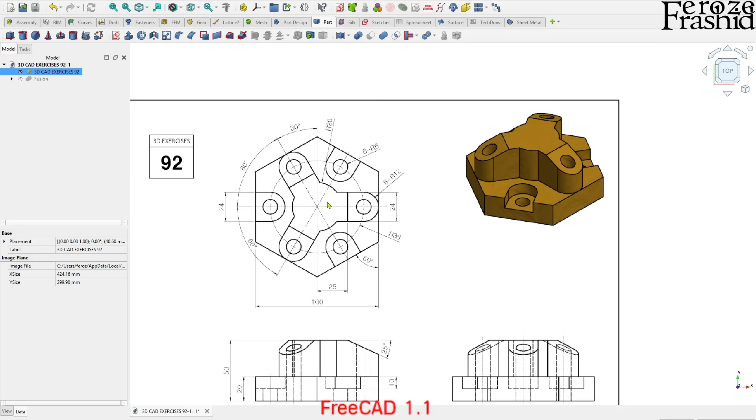Today I want to work on this beautiful model downloaded from studycadcam.com. Here we have this geometric shape that can be built in 2 layers, and I want to focus today's model building specifically on replication by arraying. In the forum, I've seen several posts where beginners in FreeCAD try to build this whole sketch in one sketch, trying to build this complex model out of 1 or 2 sketches. The point is we can take one repeatable unit, build off of it, and then replicate it later. That makes our life a lot easier, and that's what I'll be focusing on today.

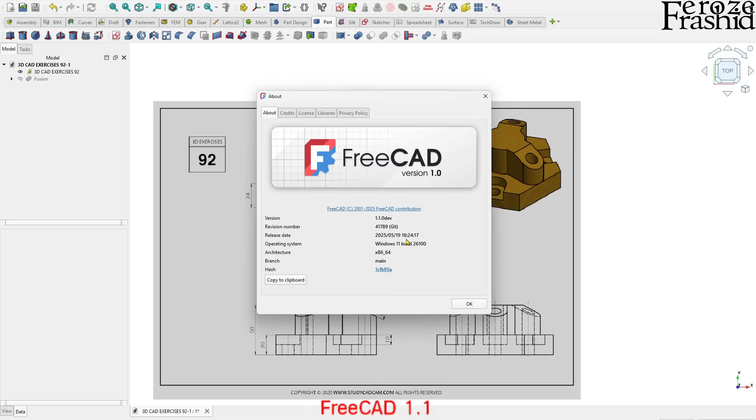I have FreeCAD 1.1.0 developers version installed on this computer, so I'll be using that. But if you are using FreeCAD 1 or 1.0.1, the current stable version, it will be the same except maybe one thing, so I'll tell more about that when I use that feature. Other than that, it should be the same. I'll also be using both part design and part workbench, so I can show you how to use 2 different kinds of arrays out of these workbenches in this model.

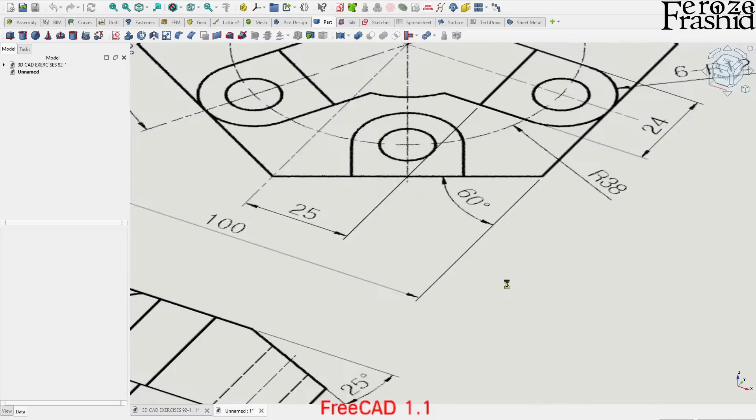So with all of that, let's go ahead and start building this model. I'll start with a new file, and then I'll pull in that technical drawing into this workspace. Just drag and drop works.

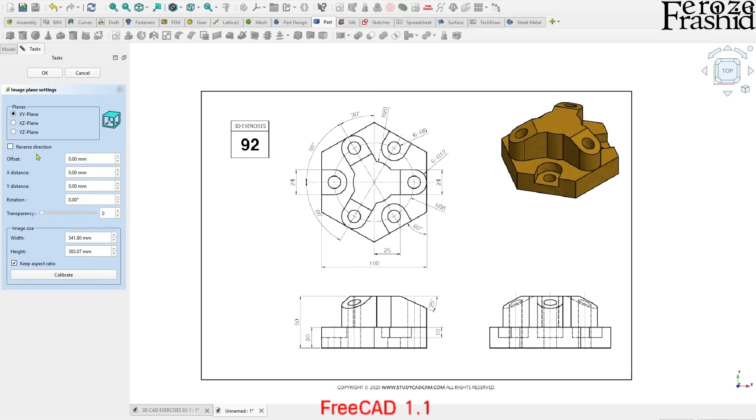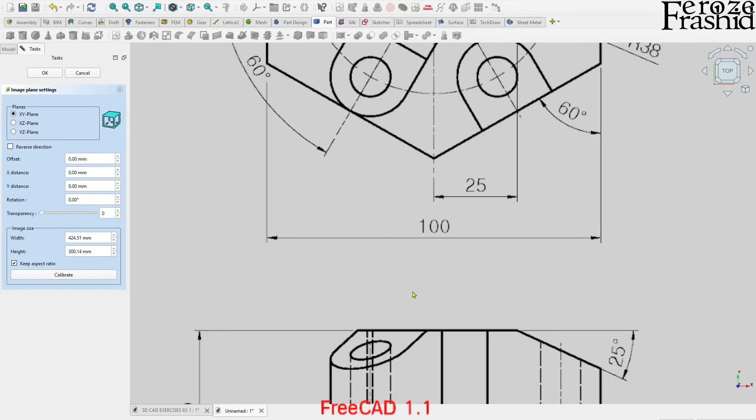Here this dimension is given as 100 millimeter, but we will have to make sure that's 100 millimeter measuring of the image, so let's do that. Let's calibrate this image. Double click on that image, and on this panel on the left, I want to go to calibrate, and I'll have to do 2 clicks. One click at the end of one end of this 100 millimeter dimension, and another click at the other end. Now in this middle cell, type in 100 from your keyboard and hit enter. So that is now calibrated.

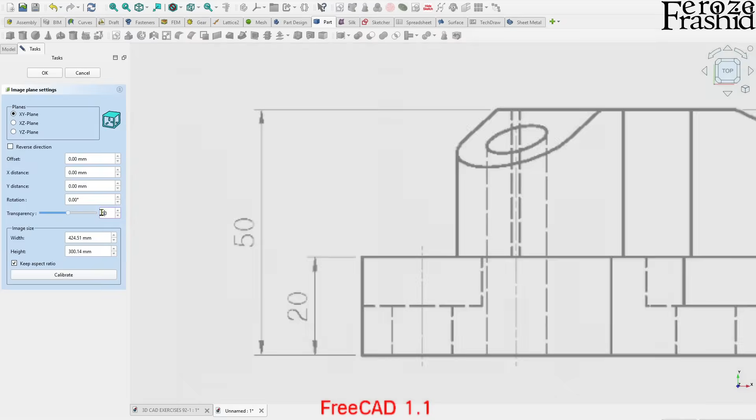If you want to verify your calibration, pick another spot and do the calibrate. Don't do the second click, but here it says 50 millimeter, which matches this value, so I guess we are fine. Hit escape, and now transparency, make it 50. It will come in handy later. And then we want to keep it on XY plane. We'll be using this plan view to work, so XY plane works fine there.

Now we will start with part workbench, and then we'll move on to part design later on. One of the shortcomings of part workbench, not a limitation, is it does not show the center of the workspace right away. So I want to view that. Go to view and go to toggle axis cross, AC. That will show you the center of the workspace, and then bring in the image, and you can see that the image is definitely not at the center.

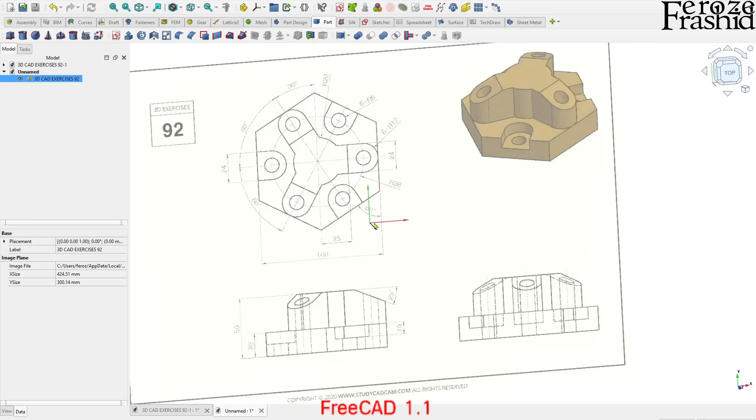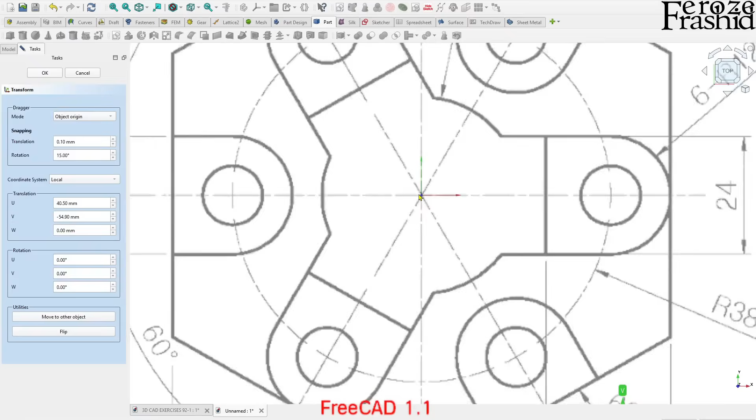So this is our image center, and I want to move this center to the center of the workspace. That's part of the image processing. Right click on the image, transform it, and make it like I did it 0.1 millimeter increment. You can work on it as a 1 millimeter increment too. I want to use these 2 axes to bring it to the center. A nearby value would be fine. That's dead on center, so that works. That's the end of the image processing.

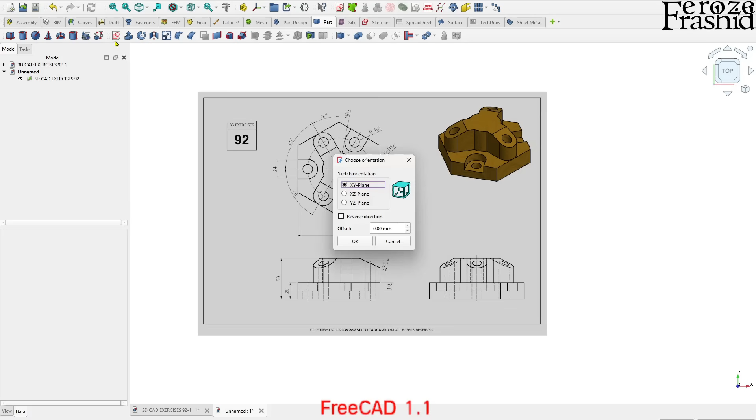Hit AC on the keyboard, that will take away that axis cross, we don't need that right now. Now, as I mentioned, I'll be starting work in part workbench. Here I want to start with a sketch, since sketching is the first step of modeling. Let's do that. Because the image is on the XY plane, we want to start in the XY plane.

Now here I'll have to sketch one part. Which part do I want to sketch? My goal is to build this lower part first. So when I'm building the lower part, this upper part, these three ends, I'm not keeping that in my consideration. I think this lower part is like a hexagon, so taking these six sides, I believe...

Taking this part between this part would be much easier for me to draw, so I'll do that. I'll take the polyline and draw this boundary. Because the image is calibrated, if we go off that image direction, it will be almost perfect, but we want to make it perfect. So between these two edges, hit D on the keyboard. Select these two edges, the axis and one of the upper edges. Hit D on the keyboard, that will bring in the dimension. Apply 60 and hit enter. So that's one edge, and do the same on here.

These two are bound by that. I think these two are equal in length. So there it is, and the length is 50 millimeter. It's not directly given here, but you can do some calculations. It will come out as 50.

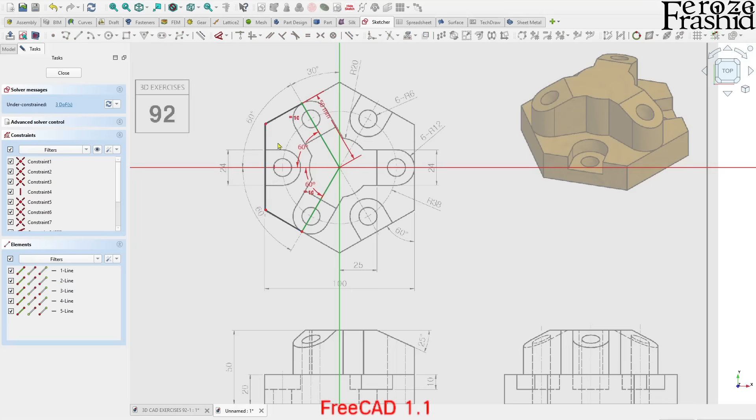This distance, this axis, this edge is symmetric by the axis. So take these two ends and take the axis as the third choice, and then hit S on the keyboard.

Now let's do this distance. This distance is 100 divided by 2. So take this point and hit D on the keyboard. That will bring in the dimension. Based on where you're taking your mouse, it will be different kind of dimension. So bring it downward and apply a 50 millimeter dimension there.

So we have one degree of freedom, which is this side, the length of it. I think this is 50. Let's see, take that, hit D on the keyboard. That comes around like 57.

I don't know about this length, but we know the angle, 60 degrees. So take these two ends and hit D on the keyboard and apply 120 degree angle. So we got away without having the length here.

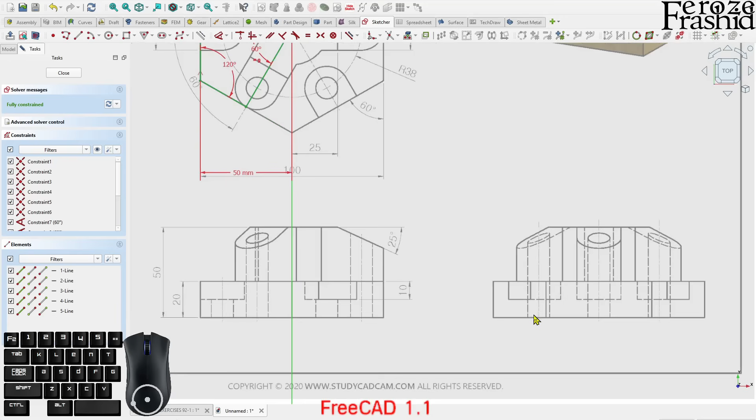So that's a fully constrained sketch, and I can see that there is a hole in the middle in this part right there. So let's draw that hole as well.

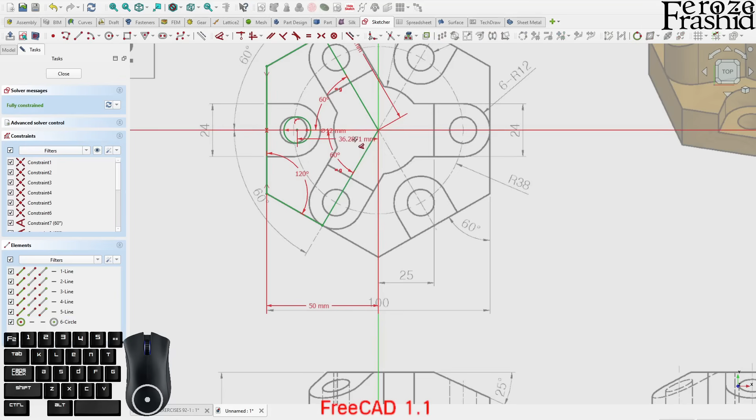This is a 12 millimeter diameter hole, and that is sitting on a circle of radius 38. So the distance between this point and the axis, the center, is 38 there. So that's my first sketch.

Let me hide this image by hitting space. So that's my first sketch. Now this is sitting right at the origin.

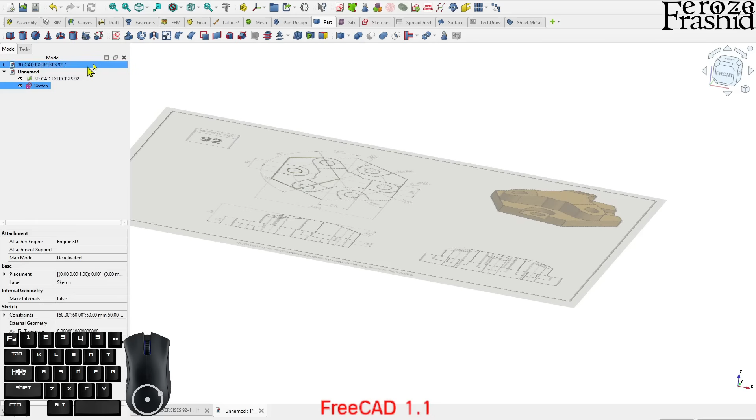Because I want to build this lower part first, I want to move it downward. So I'll select that sketch and extrude it for 20 millimeter, but make it downward and hit apply. So it is going downward.

So that's one part. Now there is a depression right here. It will come at this location. So what I want to do is draw another sketch right at this location, but it is at the origin, so I don't have to attach my sketch to anything. I'll just draw a sketch on the XY plane right there.

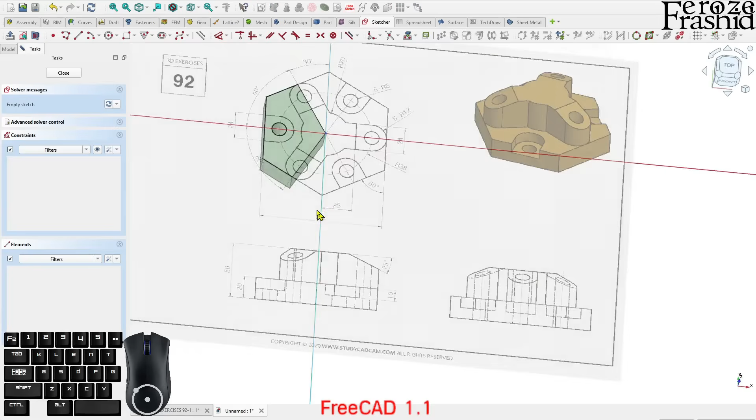And here I'll just draw this depression. So it will be something like this. To close it out, hit M with the polyline. That will bring in the arc, and I apply a tangency between these two.

And so this point, the center, will be at that same 38, but first take this point, put it on the axis, and then apply a dimension of 38.

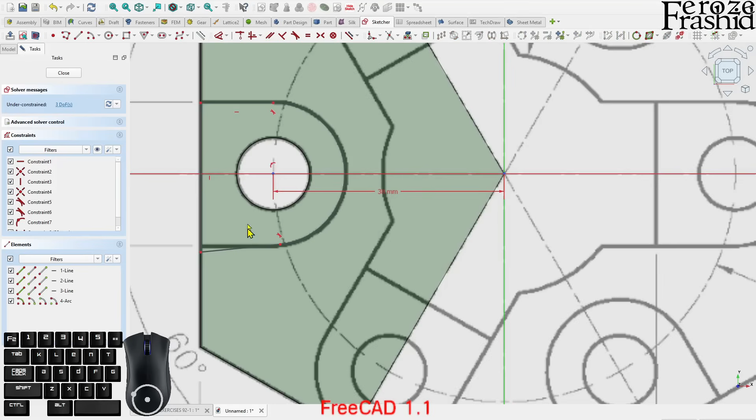We could also take this external geometry from the previous extrude and get away without applying this 38, but I know that for sure, so I didn't bother going for the external geometry. And let's make this one horizontal.

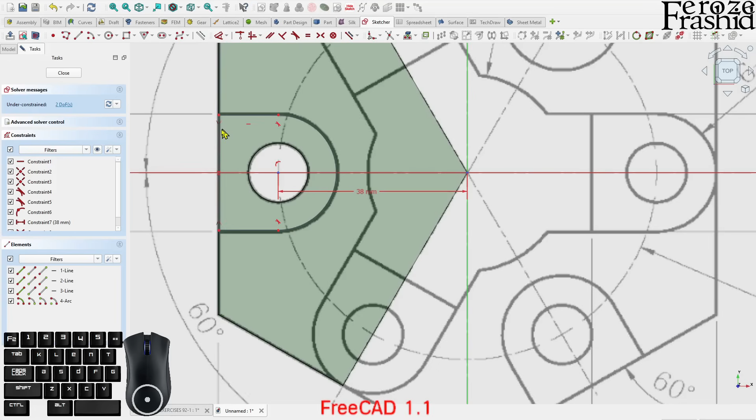Now let's make this symmetric by the axis, and let's come up with the total length. I think there is a radius somewhere here, radius 12. So this is radius 12, and that's it. Oh, there it is.

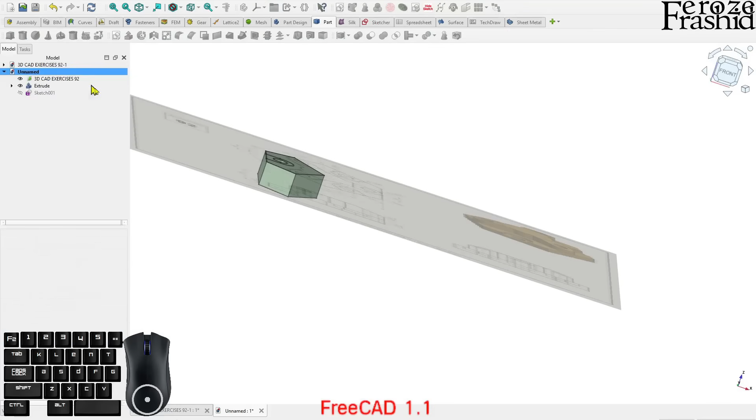It has to be on this edge, which was 50 millimeter from the origin. So that is my sketch. I cannot see it, so let me hide this image. That's my sketch. It will have to be depressed by 10 millimeter.

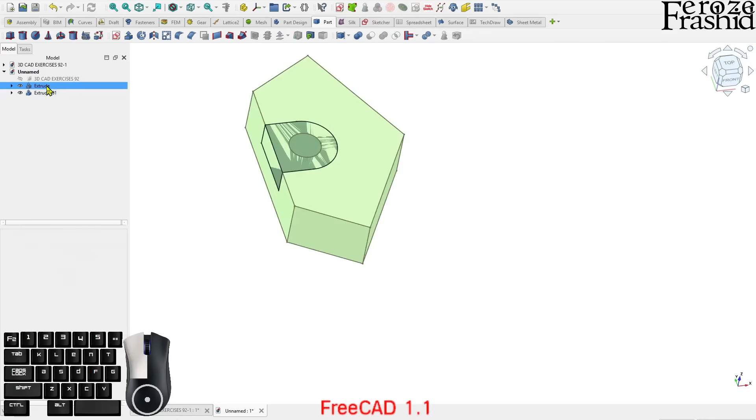So take that sketch, make a depression by 10 millimeters. So take it reversed, hit apply, close. And now I can make a cut. So keep this one, delete this one, and there.

So that's my repeating unit. With respect to the image, that's where it is sitting in the corner. We can repeat that 3 times, and that will be the whole base. Let's hide this image now.

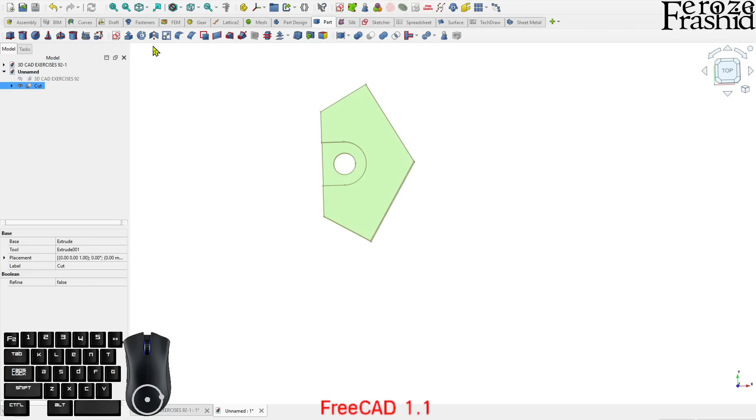So select this cut and go to draft workbench. Now because I built this part in the part workbench, I can easily jump into other workbenches and do some other stuff. So select that cut, go to draft workbench.

In here there is this array tool. We will be working with polar array. The polar array is something that rotates around a circular center. So we will go with polar array right here.

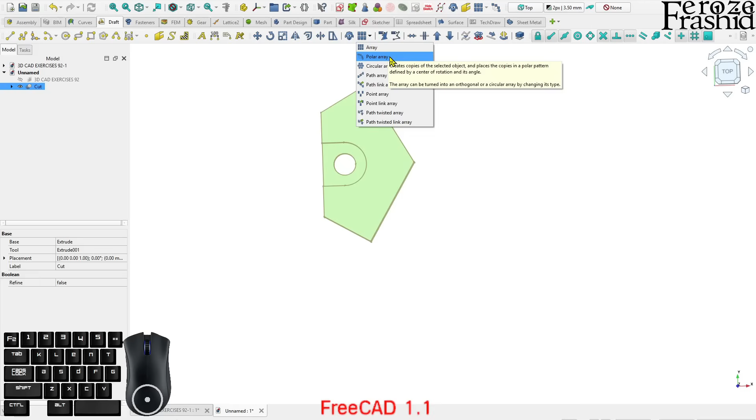As soon as you move this mouse, you can see that the center of rotation is moving right here. The grid showed up, I don't want the grid there. So this is the center we want, which is to be 0, 0, 0. So let's do that, we want a reset point, so it's all 0. After you reset it, don't bring your mouse over here because it's picking up the point by the mouse.

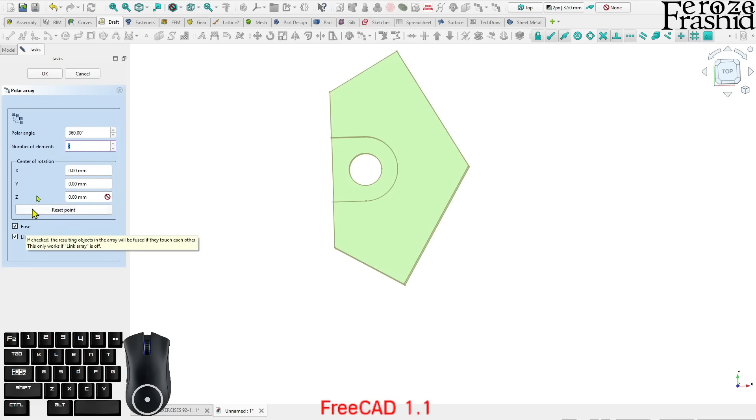So reset it, and in here, number of elements, I want to make it 3 and keep it fused, right? Hit OK. There, so there is my base. This is what it looks like. We build the base in part workbench, right?

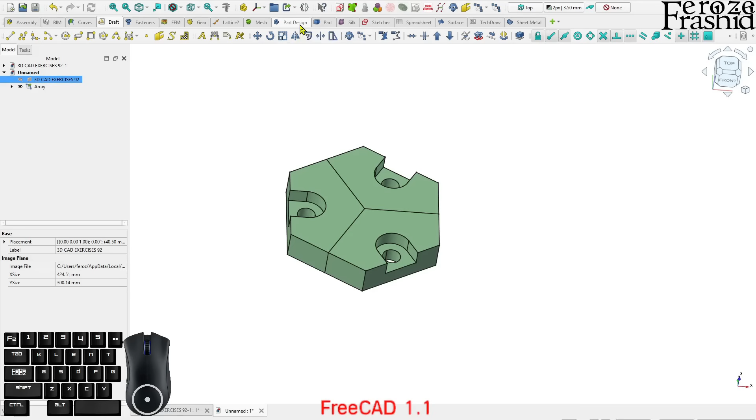Now I want to show the same thing but in part design. I have several other videos distinguishing between part and part design, and my last video in this series was how to combine two parts created in both part and part design, putting them together in a Boolean operation. Today I will show you how to import a part created in part workbench to a part design body.

So go to part design. First thing in part design is to create a body. On the tree, this body shows up highlighted and bold. Double click on it, and the boldness and highlight will go away. It means this body is not active. In part design, you always have to have an active body, so double click on this body to activate it.

If you are planning to use any part object or any other objects created in another workbench into part design, bring it in as the first object in the part design body. So I want to use this array into the body. Drag and drop it in here, and that will create a base feature.

Select the base feature, and in the data you will see that the base feature is linked with the array. So if you rename this array to 'array from part workbench,' now you can see that the renaming is reflected in the base feature too. So that's the link. All right, so we've got the body and then the array. That previous object has been hidden from our tree, but it's there—we can see that, but it's hidden from the view.

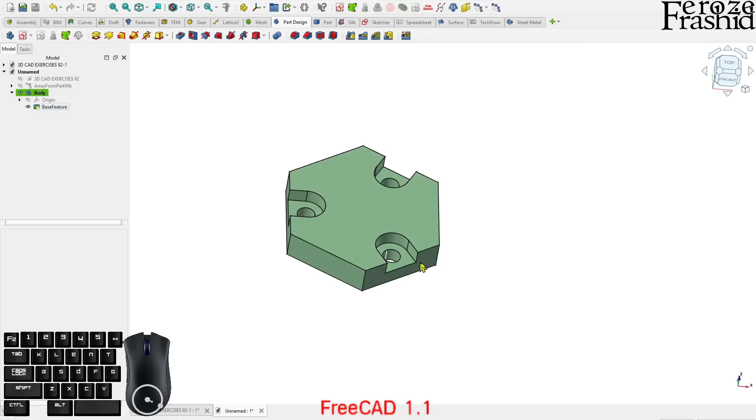Now let's bring in our image. Now we want to build in this top part, so I think it will be this corner. So this corner would be my best bet, so I'll be building that.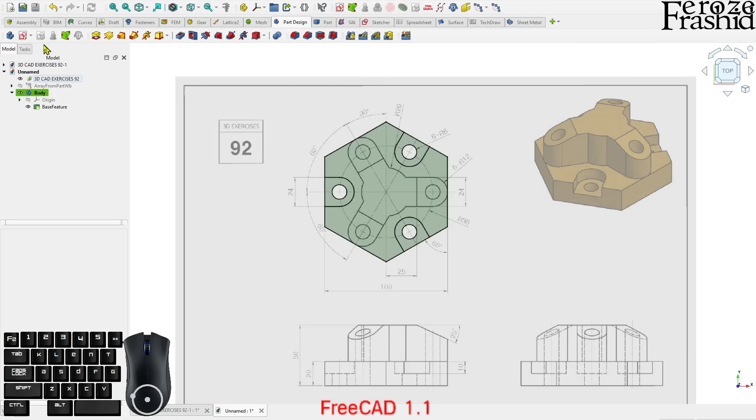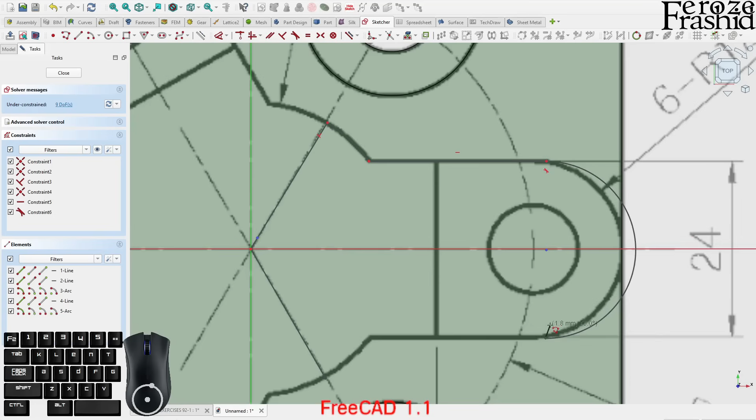Now, without selecting anything, let's start drawing in sketch. I will be using the sketch button from the part design toolbar, not from my shortcut. So use that and make a sketch on the XY plane. Hit OK. Here I'll start with a polyline and make it there. All right, and hit M—so with polyline, you have to hit M to switch between different modes of edges or geometric edges, like circling. If you miss one, you can come back to it, like that.

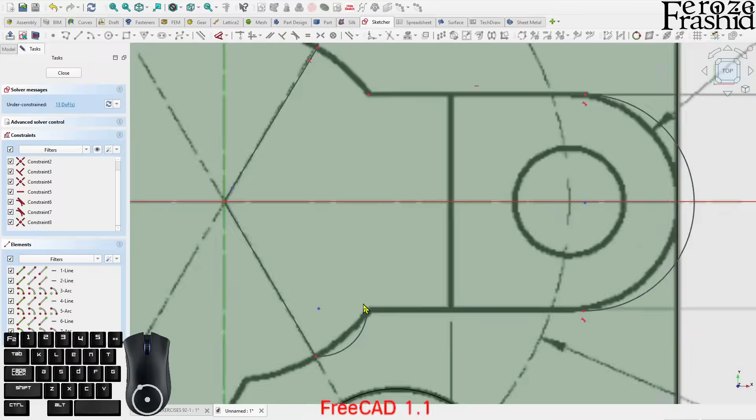I'll take this normal constraint, delete that, so that disconnects it. Actually, this will be at the center, so it will be this point there. I don't like the normal constraint—it messes up things every now and then, so delete that and connect these two.

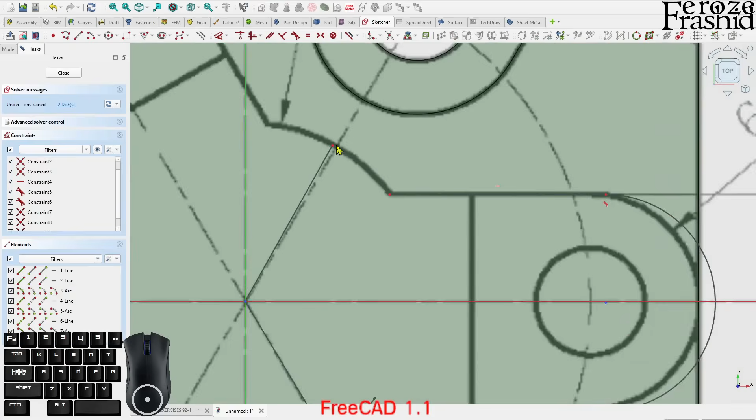All right, let me hide this image because that is mixing things up. Now make these two points together, and I want to make it horizontal. I believe this point should be on this axis, and this will be 38 millimeters away from the origin, and this is going to be 12—I remember that from the previous section.

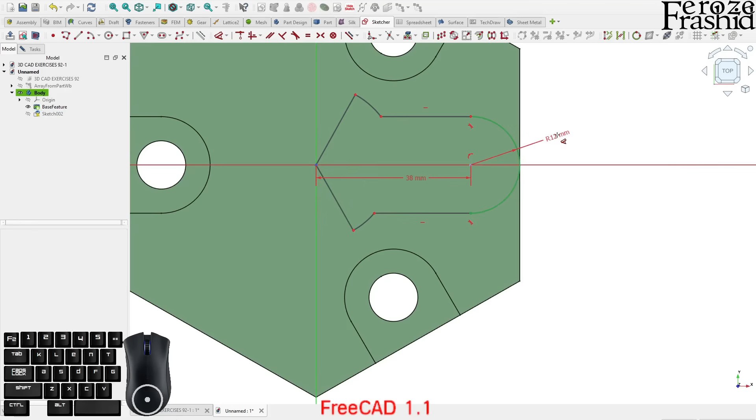And there is—so this is radius 20. All right, so let's make that happen, 20. And I want to make these two equal. All right, what else, this angle? So this is going to be—oh, just take the edge, take the axis, and hit D on the keyboard. That's 60.

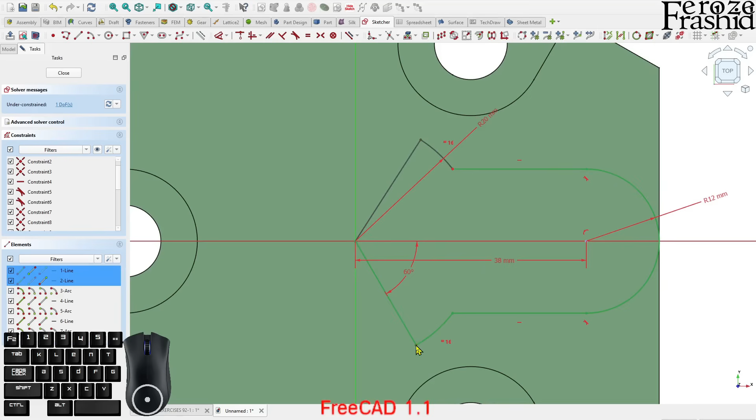All right, so in the previous one we applied another 16 here. We can also do this: I can make these two vertical, V on the keyboard. Oh, that's too many constraints. Let's Control Z that—I wanted to show you that's also another option. I guess, oh, take these two points here and make them centered. Now let's try that—there, it worked. So you don't have to apply two angles; you can make it symmetric, or make them vertical points. So there are different sets of constraints you can apply on the same set of edges.

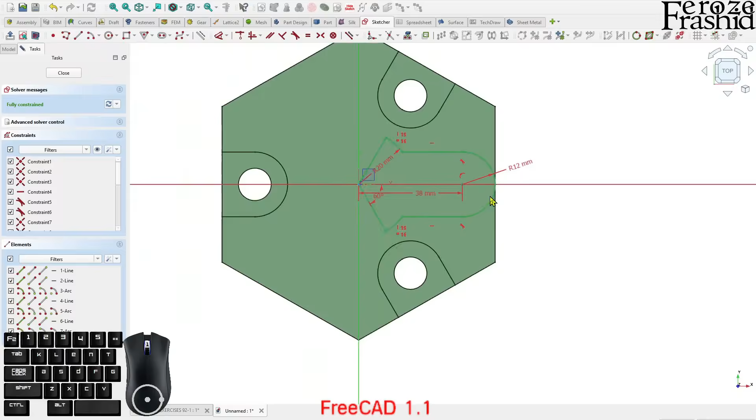All right, that's it, and I think close it out. Let's see—no, there should be a hole. All right, so I think this is the sketch that we were working on, and here there will be a hole of—that's going to be 12.

All right, let's make that visible. It's sitting on top of this previous base feature that we brought in. Now I want to extrude that, pad it up for, I believe, 30.

Now, yes, total length is 50. We previously worked on 20, now we upped it for 30 more.

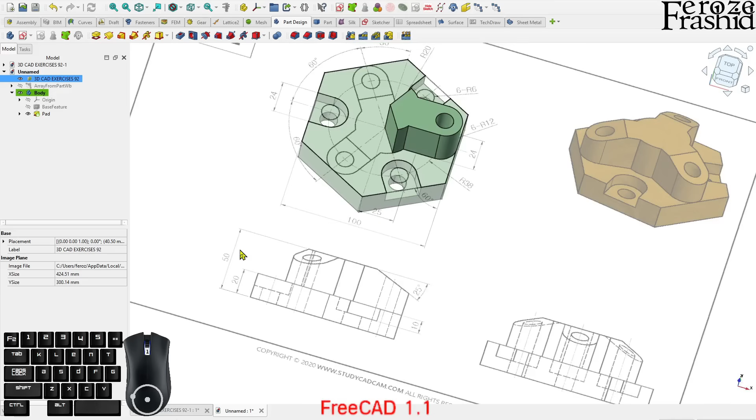Now there is this cut we'll have to work on. That's a 25-degree angle, but this beginning point starts at 25 from the center. Previously we built this part and deleted it manually. Here we will be using the pocket function, so the deletion part is automatic.

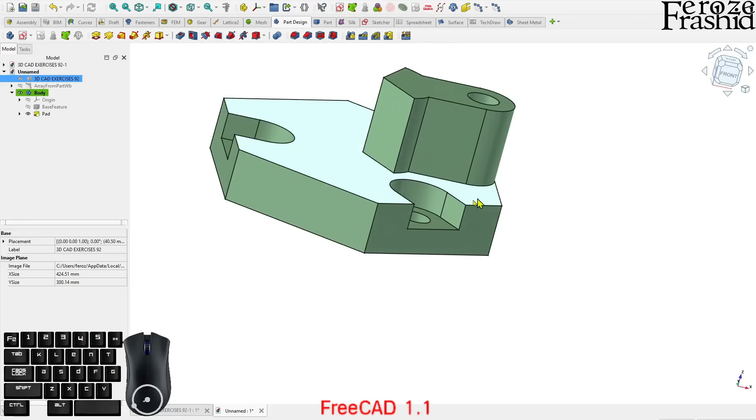I can draw a sketch on this face, XZ face, and this time I will be bringing in this external geometry, this edge. Now if you are using 1.0 or 1.0.1 version, this external geometry button is bringing in construction geometry all the time. But starting from 1.1, if this button is saying solid here, this will be bringing in solid geometry.

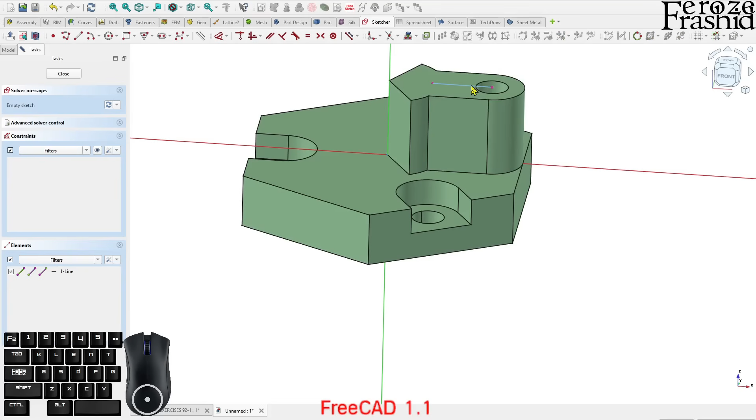So if you are bringing in solid geometry, in this case, I don't want it as solid. So I want to select that and make it construction geometry there. I want to turn on the view section.

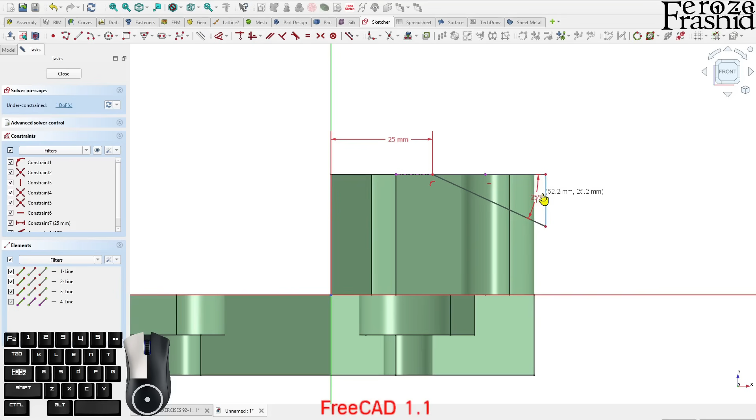This is going to be my pocket profile. As I said, this point will be at 25 millimeters from the origin. The angle between these two is going to be 25 degrees, and this could be right over there, or somewhere here, it doesn't matter. It's a negative profile, so I just keep it hanging like that.

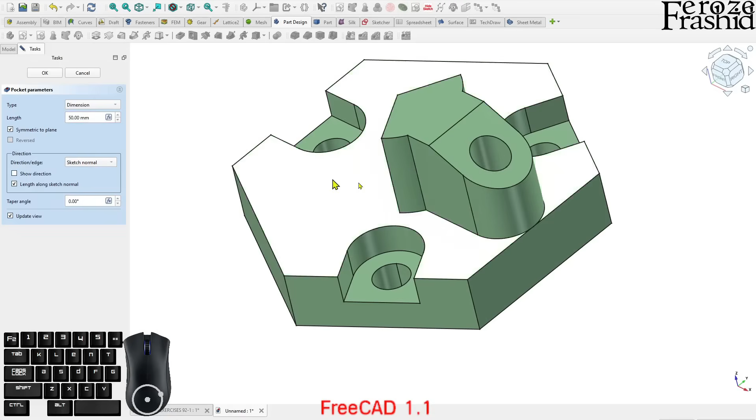Now I can pocket it, so you can see that it's cutting away things. It's extruding and cutting things away at the same time. I will make it symmetric to the plane, and make it through all, or like a really ridiculously high number, say 50. Yeah, that cuts things away. And hit OK.

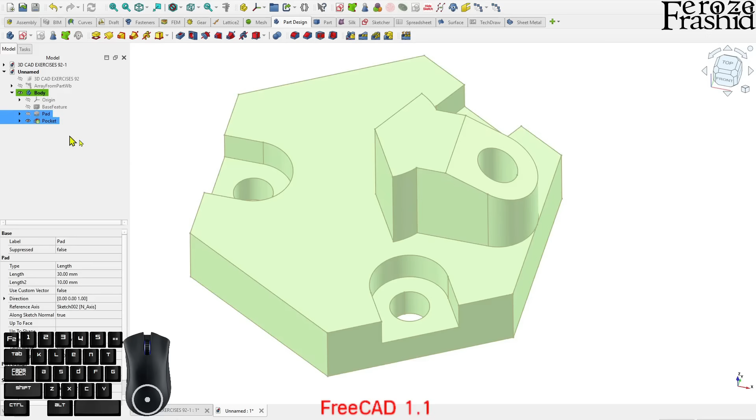Okay, so we got that unit, the pocket. So here we have the base feature, we have the pad, we have the pocket. The base feature, we don't have to repeat it, it's there already. So pad and pocket, these two units, will have to array it 3 times.

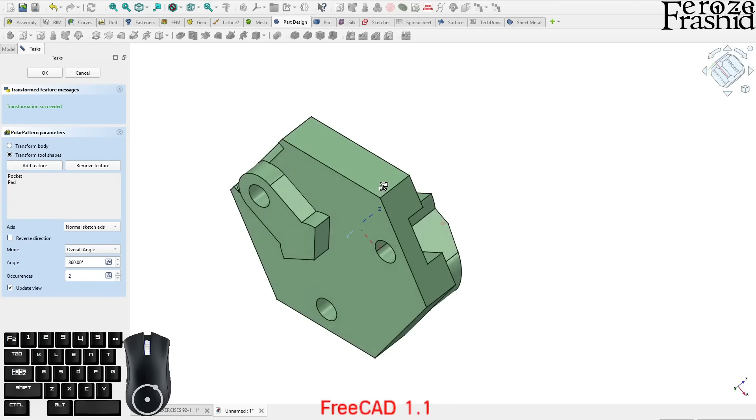In Part Design, it has its own array button, the polar pattern. So select these two, go to polar pattern right here. I can see that it started. Oh, they did that 2 occurrences. So one is here, one is there. Let's make it 3.

And it looks really weird because the axis is this normal sketch axis, I don't know which one that is. We want to make it the z axis. So base z axis, that's what we want to make.

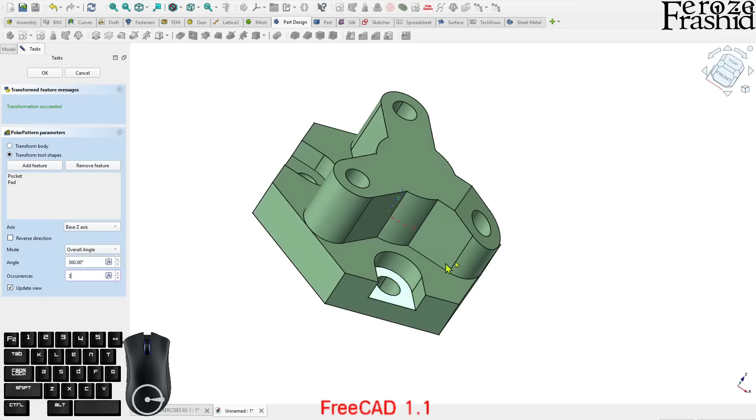So always remember to add all the features that you want to replicate. For here, I added the pocket and pad. For some reason, the pocket is not being replicated, it's the pad only being replicated. So see if the transform body makes any difference. It does. All right, that's great.

So that's also another change between FreeCAD 0.21 version and FreeCAD 1.0 version. This window is changed. But that's it.

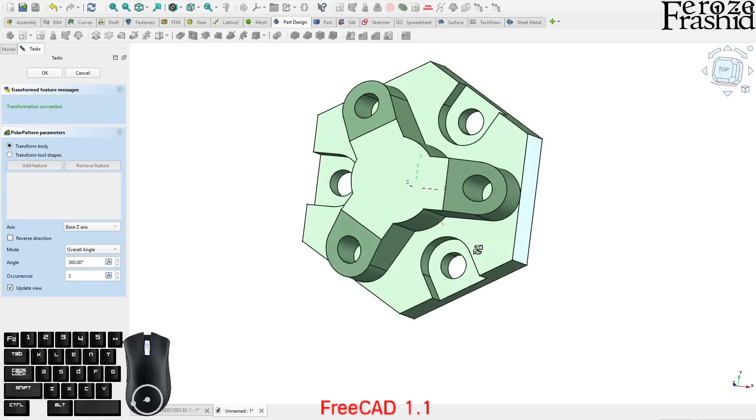We built our model. We used polar array from Part Design and polar array from Draft workbench. We built half of this model in Part workbench and half in Part Design, but put them together in Part Design this time. So there was a lot of mixing here and there.

I wanted to do it intentionally so you all know how to mix things properly. Normally, everyone says, if you are new in FreeCAD, don't mix things together in Part and Part Design. You can, if you know how to do it.

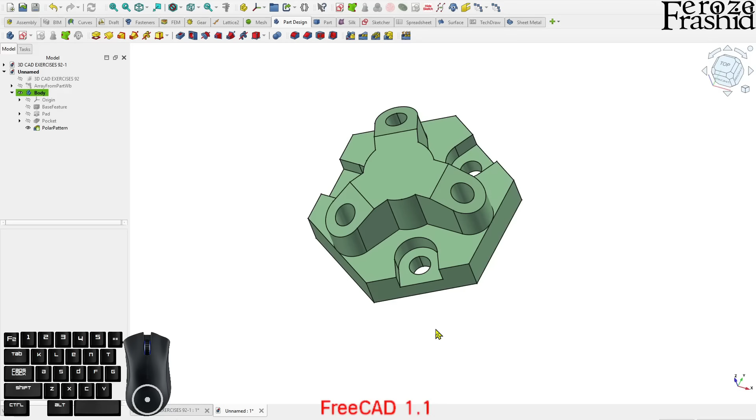In the previous video, I'll leave a link to that video. I showed how to put things together in Part workbench. In here, I showed you how to put things together in Part Design.

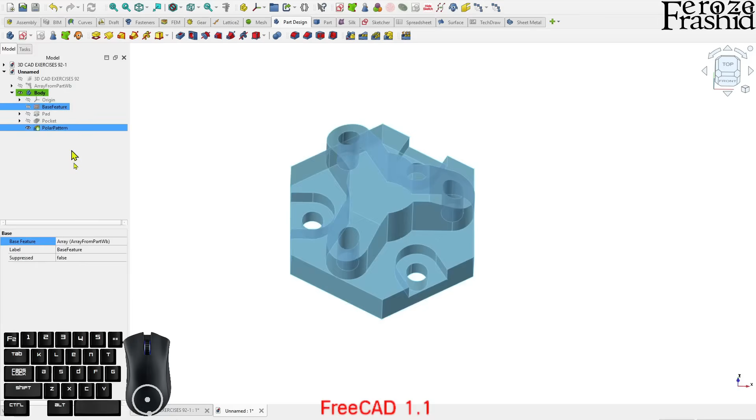Always put this base feature as the first item in this body if you are doing things like bringing things in Part Design. I particularly don't like this base feature thing, it's my personal preference. I don't know why, but it feels like it limits my ability to go back and change some things, and then I'll have to relink my thing right here. So base feature, I hope it will get improved over time.